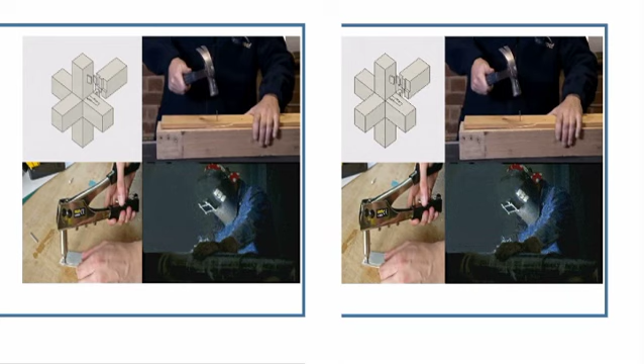Today we are going to continue our exploration of joining methods. In our last lesson, we had talked about nailing and its applications. Today we are going to have a look at screwing as well as bolting.

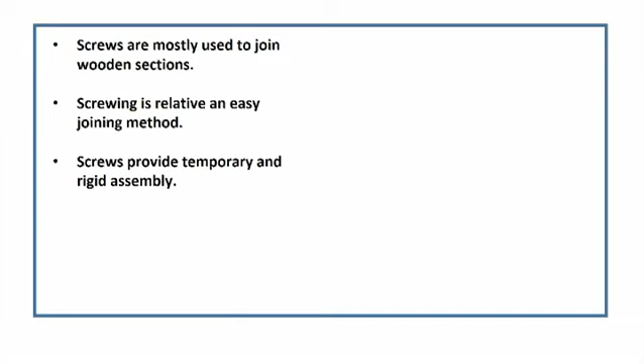Screws are used mostly to join wooden sections. They can also be used to join metal to wood, plastic to wood, as well as plastic to plastic. Screwing is also a relatively easy joining method.

The components of a screw are the head, the shank, and the thread. A joint made by screws can be easily disassembled without damaging any parts making up the joint, therefore provide rigid and temporary joints.

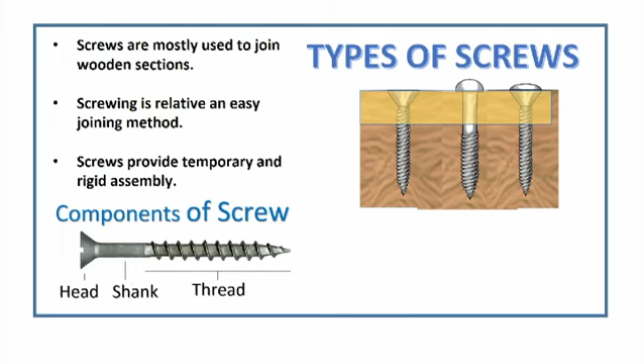Different types of screws have been illustrated here. We have the countersunk head screw, the round head screw, and the raised head screw.

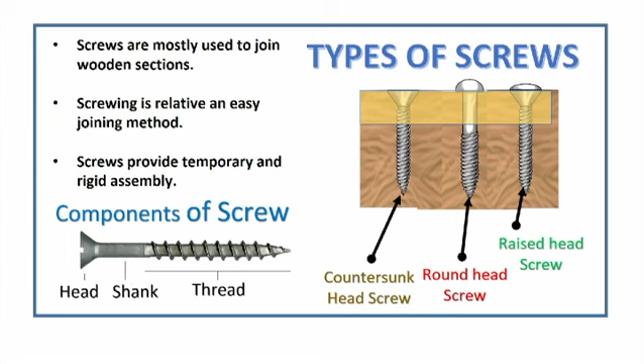The countersunk head screw is the most commonly used type of screw. Its head has a conical shape and is inserted into the wood so as to leave a flat, level surface. Amongst the uses of countersunk screws are to join wood to wood and to affix hinges in doors.

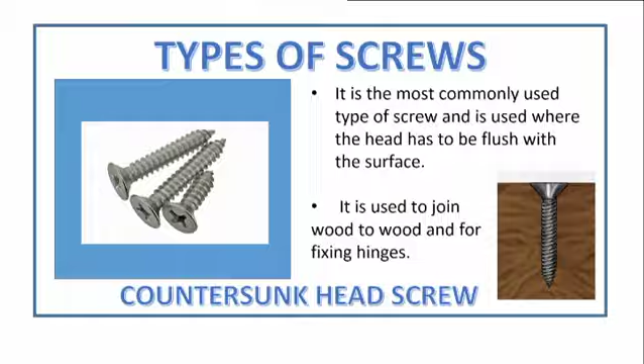A round head screw has a round head that lies above the surface of the material. It is used to screw thin metal fittings to wood and also for joinery work.

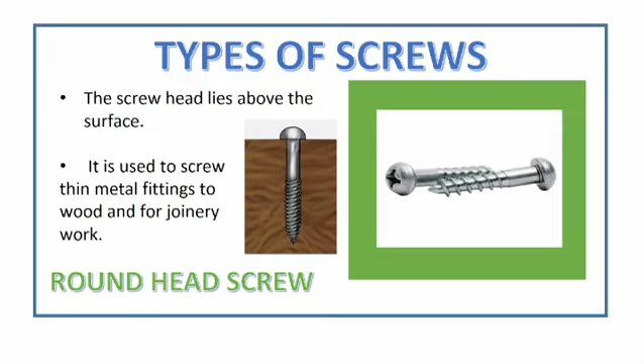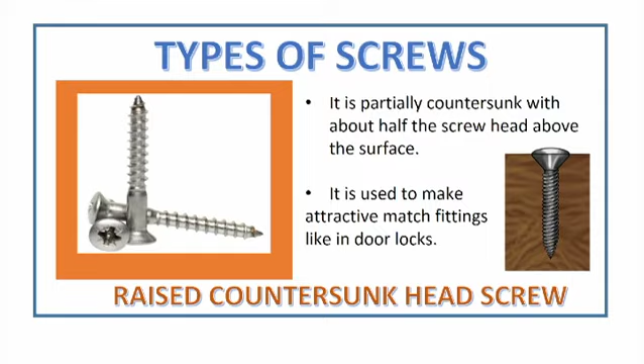Raised countersunk screws are partially countersunk. That is, half the screw head is above the surface and the other half is underneath. It is used to make high-quality products where the appearance is quite important.

A self-tapping screw can be referred to simply as tapping screw. They have higher strength and better penetration. They are often called sheet metal screws because they are primarily used in sheet metal, even if they can also be used for wood.

A self-drilling screw is a self-tapping screw with the added feature of a drill point. The drill point looks like the point of a drill. It will drill a hole and form the mating threads in one operation.

These have square or hexagonal heads and can be used to fix steel sheets on metal structures, especially when connecting steel roofing sheets to steel tubes.

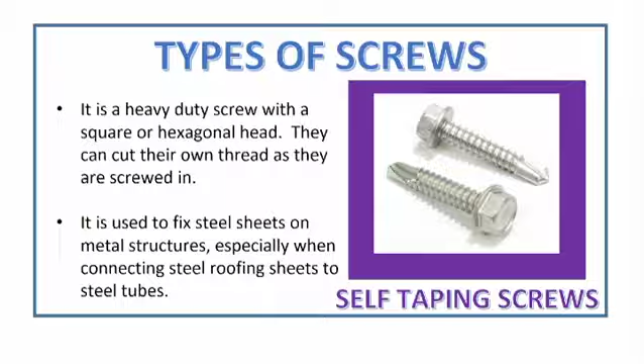Other types of screws are the Twinfast screw, which are twice as rapid thanks to their double thread, the coach screw, which is used for strong joints in timber and masonry, and machine screws, which are blunt-ended screws used to fasten metal parts together.

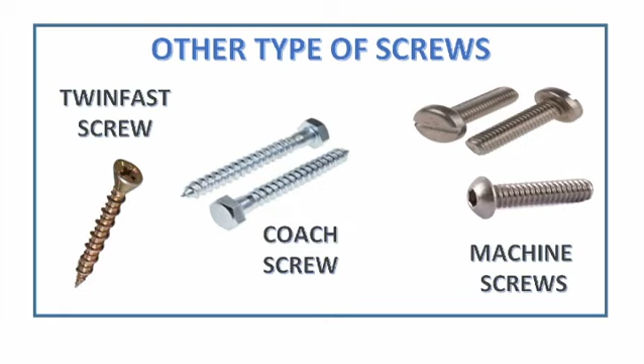Screws are also classified according to their type of head, which can be straight slot, Phillips recess, or Posidriv recess.

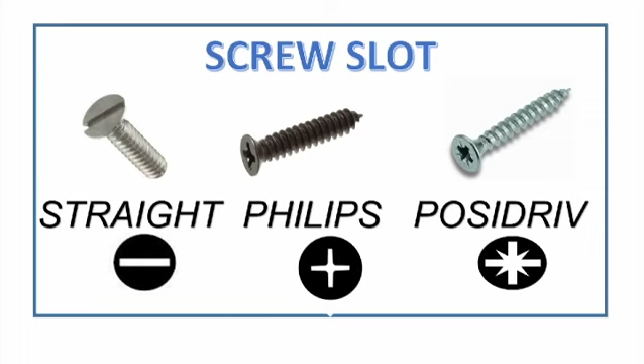Tools that are used with screws are, for example, the screwdriver, which can be both manual or electrical.

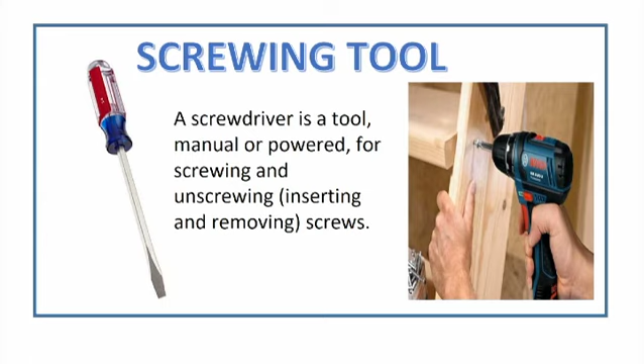Once screws are inserted into wood, their heads can be covered using screw caps to improve the appearance of the product being made. Screw cups are inserted before the screw is placed, and these also enhance the appearance of the product.

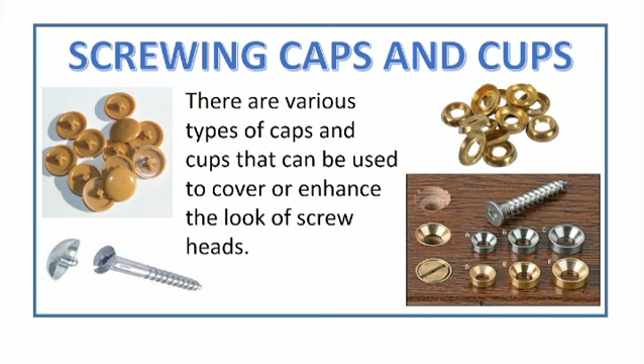The next type of joints we will look at are bolts. Bolts are preferred to other fasteners since they can hold heavy items. These are mostly used to join metal sections.

The metal parts to be joined must be drilled before a bolt can be inserted. Bolting provides temporary assembly, and the different types of bolts are the hexagonal bolt, the square bolt, and the coach bolt.

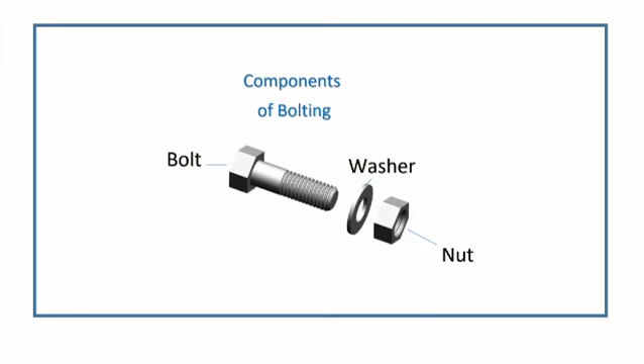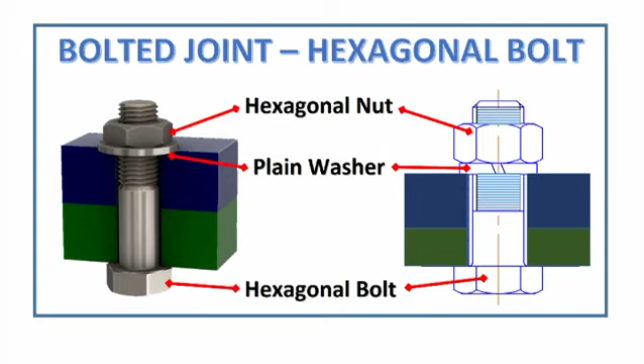The different components of a bolted joint are usually a bolt, a washer, and a nut. This is how bolts and nuts hold materials together. The materials are drilled through and the bolt is inserted, followed by a washer and a nut. In this case, the hexagonal bolt and hexagonal nut have been used.

Looking more carefully at the hexagonal nut, we realize that hexagonal bolts and hexagonal nuts are probably the most common types of fasteners. They're used everywhere, and the reason why they are so popular is because of the hexagon shape of the head, which is very versatile and can easily be held by tools from all angles, and even by hand if need be.

Bolts may have threads for the whole part of their length, and they are usually used to join parts of machinery together and also in general assembly work.

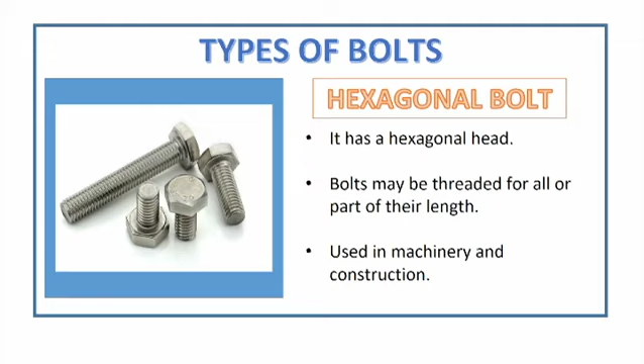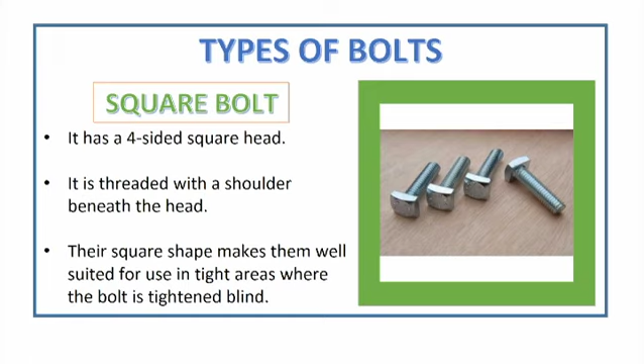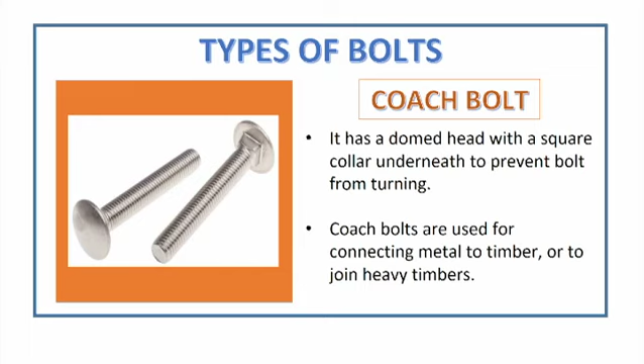They generally have a domed top and a square base under the head. This square base pulls into the wood as the nut is tightened for a secure fit.

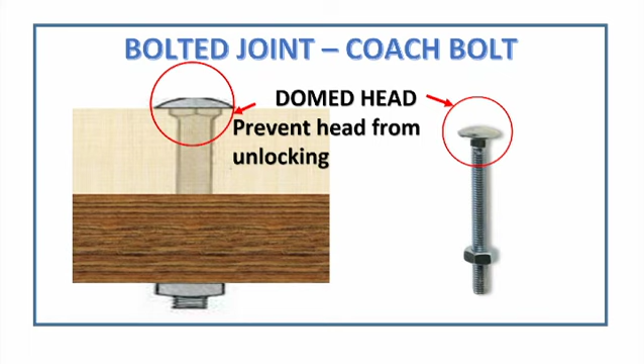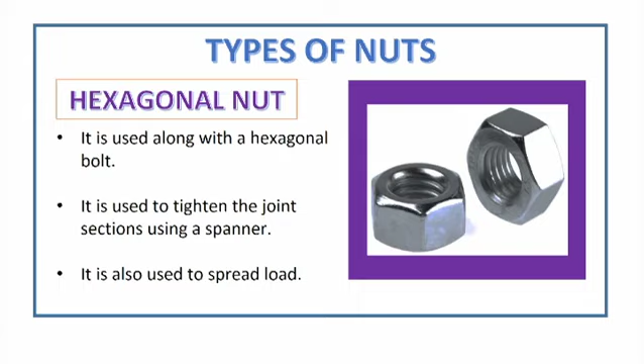Hexagonal nuts are used with hexagonal bolts. A spanner is used to tighten the nut to the bolt and hold the bolted joints together. One of the purposes of the nut is to spread the load.

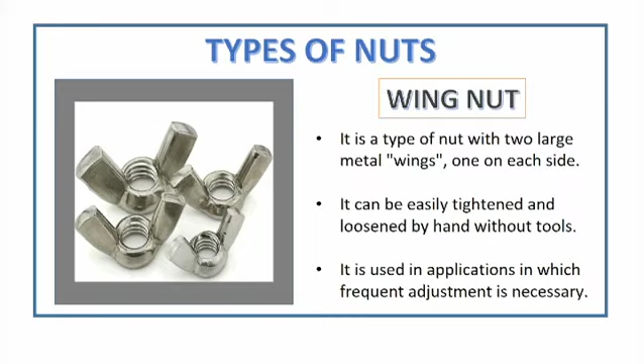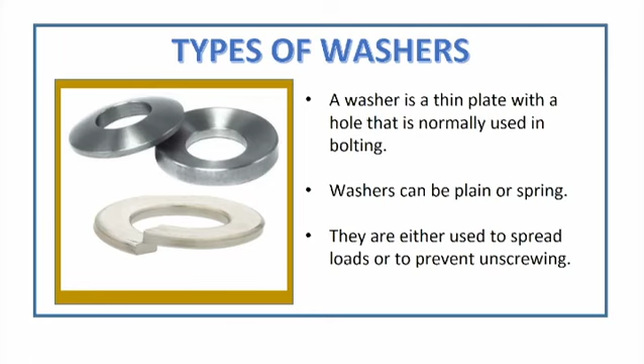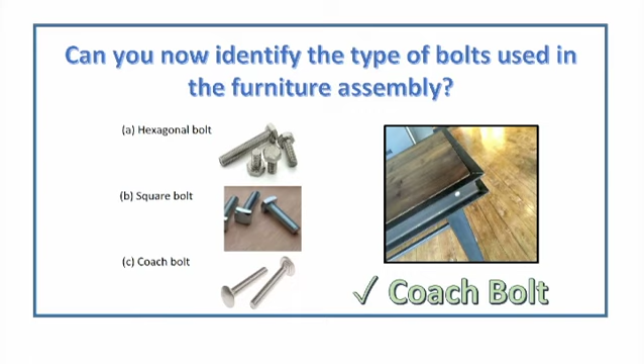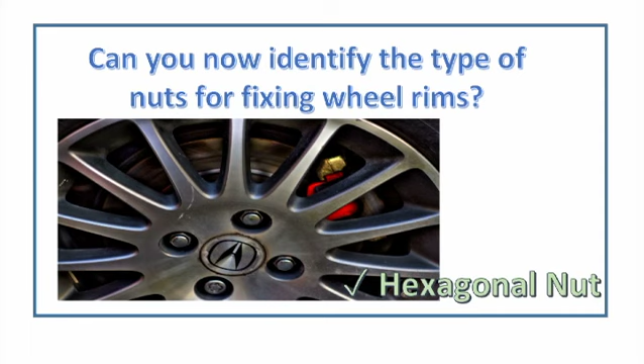Some other types of bolts available are cheese bolts, socket bolts, flange bolts, and anchor bolts.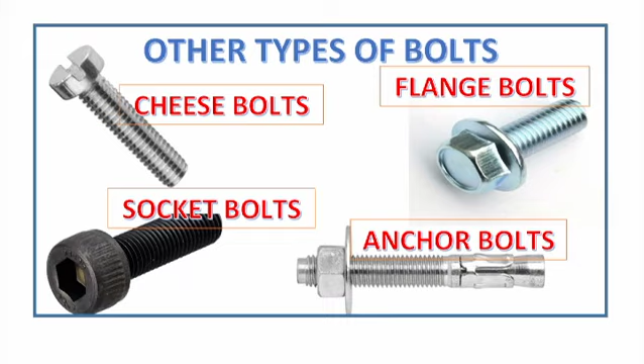Here you will see a collection of screws and bolts that have been put side by side. You can compare these in terms of size, shape of head, and type of slot. As we have seen for previous fasteners, these have quite specialized uses.

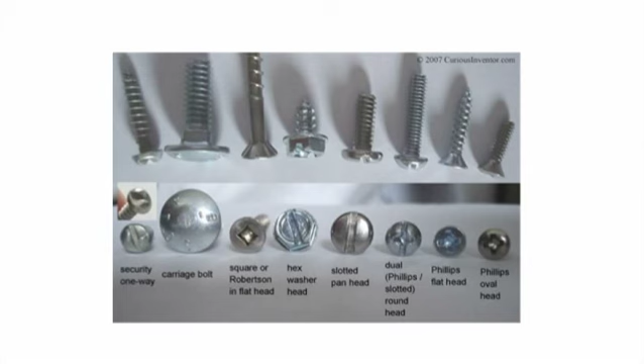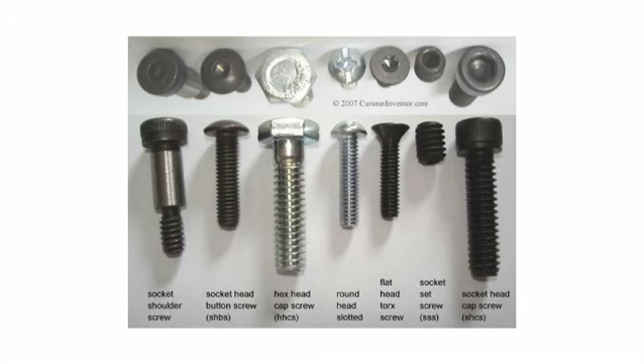The more research you do and the more you use fastenings, the more you will be specialized in their different applications and advantages.

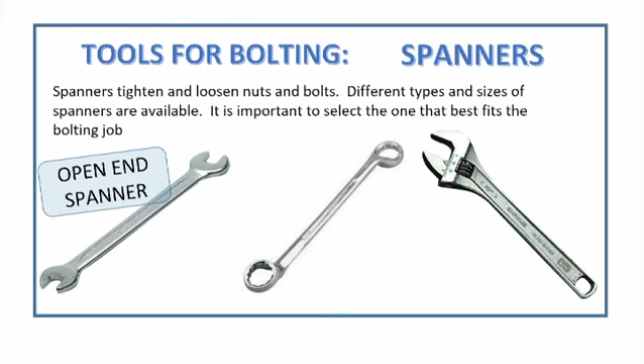Bolts are tightened using tools that are selected according to the size of the head of the bolt being used. The tools that are used are the open-end spanner, the ring spanner, and the adjustable wrench.

During this video, we have been able to see common types of screws and their uses, as well as common types of bolts and their uses. Catch us for our next video on joining methods.